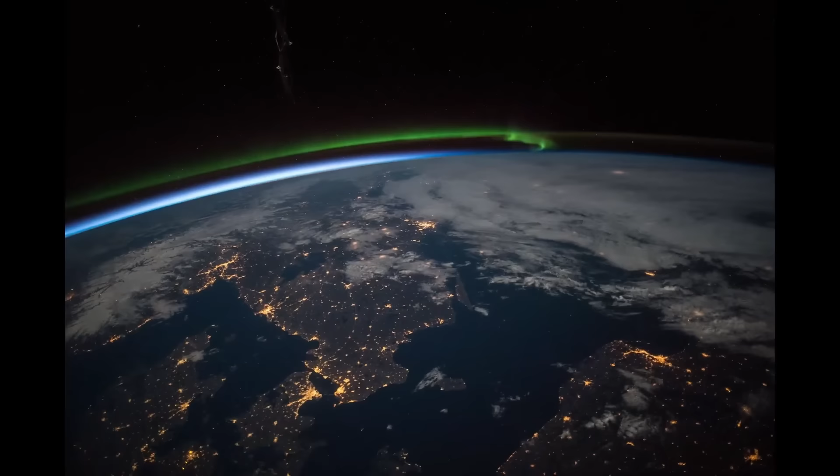The 3 countries of the main Scandinavian peninsula have all in the past maintained a policy of military neutrality.

Let's start with Norway. At the outbreak of World War II, Norway wasn't the wealthy country it is today. They were unable to defend themselves from German occupation. However, that didn't stop them giving the Germans a bloody nose, when the Kriegsmarine had the genius idea of sailing their brand new, prized heavy cruiser down a fjord and into Oslo in the middle of the night, practically unsupported. The Norwegians absolutely shredded it at practically point-blank range with Victorian-era naval guns and torpedoes.

If Norway gave Germany a bloody nose, Finland put the Soviet Union in a coma and on life support. Finland had a policy of armed neutrality, meaning a highly trained and prepared population. So when Stalin had the even more genius idea of invading, the Soviets lost 150,000 men. Soviet aircraft losses outnumbered Finnish losses about 30 to 1. Tank losses, 100 to 1. In the end, the Soviets won - won is in enormous air quotes there. Finland lost some land and maintained its sovereignty. The most Pyrrhic victory I'm aware of in modern warfare.

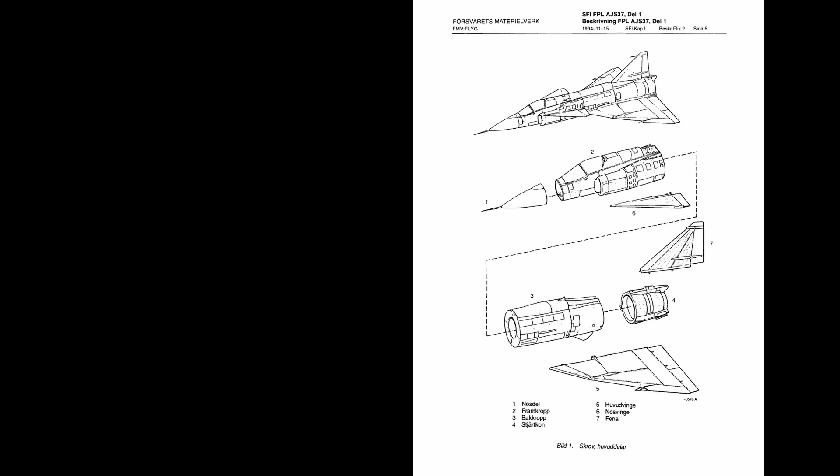I'm pretty familiar with the Viggen, but I didn't know that much about its computer until I started the research for this video. And that research has only been possible thanks to Alexander Blix, who provided me with an absolute goldmine of original declassified documentation for the Viggen.

That documentation is, of course, all in Swedish. I've therefore used some machine learning tools for translation, but Alexander and a few others have also been instrumental in providing translation for me. On the subject of language, I normally take a good shot at pronunciations. However, when I try to put on a Swedish accent to say Viggen, it just sounds like I'm from Wales, so I'll stop trying that. In my experience, Swedish people are very nice, so I doubt I'll make anyone too angry by messing up pronunciations.

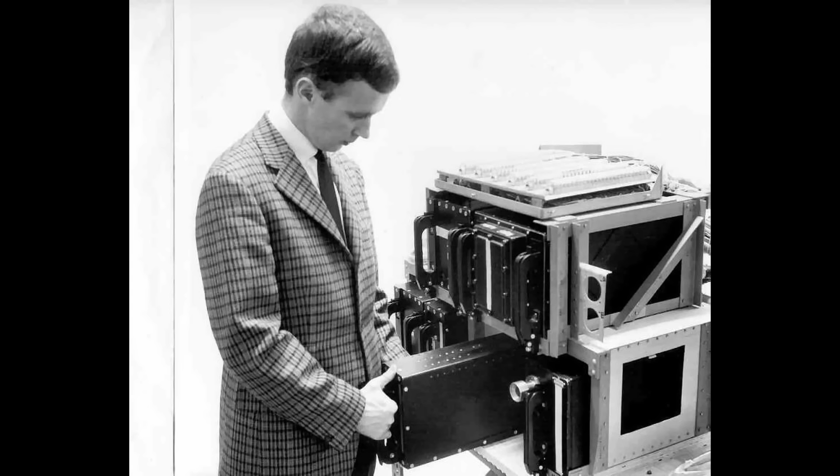As for the Viggen itself, we'll be discussing one specific variant, the AJ37. This first flew in 1967 and entered service in 1971. The AJ37 was the first variant to enter service, and it was the fighter-bomber variant. The CK37 computer was present in all AJ37 Viggens and remained in operation with upgrades until 2001. The computer I'll be discussing in this video is the original production variant of the CK37, unless I specify otherwise. There were 3 prototype versions, and the computer was upgraded with peripherals throughout its life, so it can get a little confusing going through the source material sometimes.

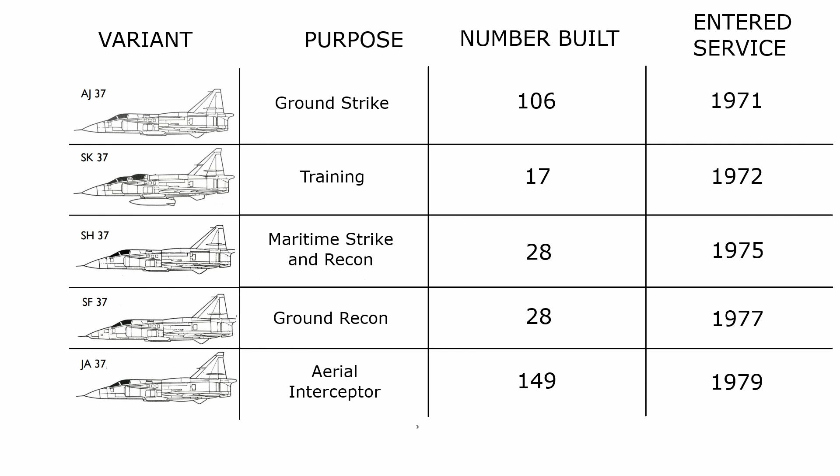On that subject, the AJ37 is not to be confused with the later interceptor variant, the JA37, which entered service in 1979. This also contained a highly advanced computer, but that computer was manufactured in the US. In fact, the JA37's computer was a direct development of the F-14's computer. But that is a different discussion. Let's find out why the Swedes were so keen to be the first to develop the first ever fighter with a compact digital central computer.

To understand the need for such a complex computer, we need to appreciate Sweden's use case for fighter jets in the first place. Most nations build or buy aircraft for a wide variety of roles or missions. Take the Eurofighter, for example. It's designated as a multi-role fighter. It can be used for ground strike, air superiority, electronics warfare, reconnaissance, SEAD, the list goes on. And it's designed to fulfill those roles practically anywhere on Earth.

Sweden's Air Force, on the other hand, is designed to operate in one place, Sweden. And the AJ-37 was designed solely as a ground strike aircraft to be used for one role, repelling an enemy invasion. There were of course some highly specific requirements to allow it to fulfill this narrow role. Probably most famously was the requirement to take off and land in just 450 metres. This allowed it to land on specially designated stretches of public highway, and subsequently be dispersed around Sweden's vast forests, hidden from prying eyes. This limited application presented an opportunity.

The AJ-37 was designed as the replacement for the Lansen, which entered service in the mid-1950s. The Lansen was of course an excellent aircraft and was only retired in 1997. But to keep up with Western and Soviet contemporaries, the Viggen would need to be much faster than the Lansen, which could barely manage supersonic flight.

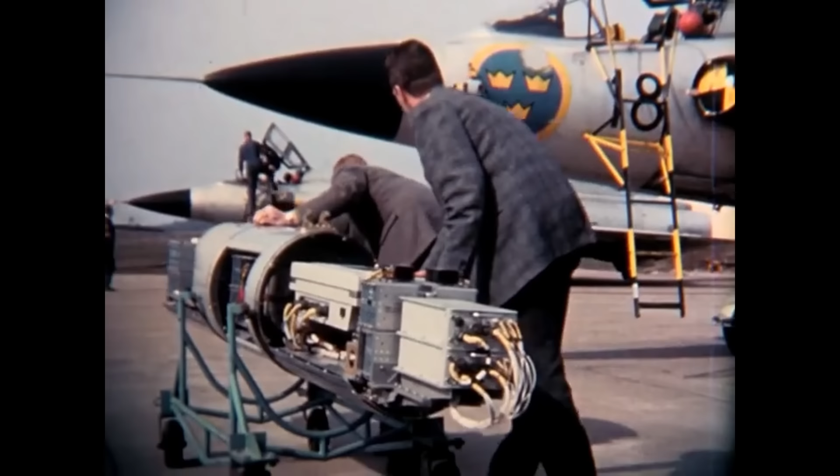A ground strike aircraft placed more requirements on the crew, navigation and weapon system management being the two most pressing. So, the Lansen was a 2-seater aircraft, a pilot and a navigator. The Draken just needed a pilot. Some of its radar and flight data needs were handled with analog computation devices, but, well, analog computers are a bit of a build, maintenance and capability nightmare. By the way, we'll revisit analog flight computers in a big way in my next video.

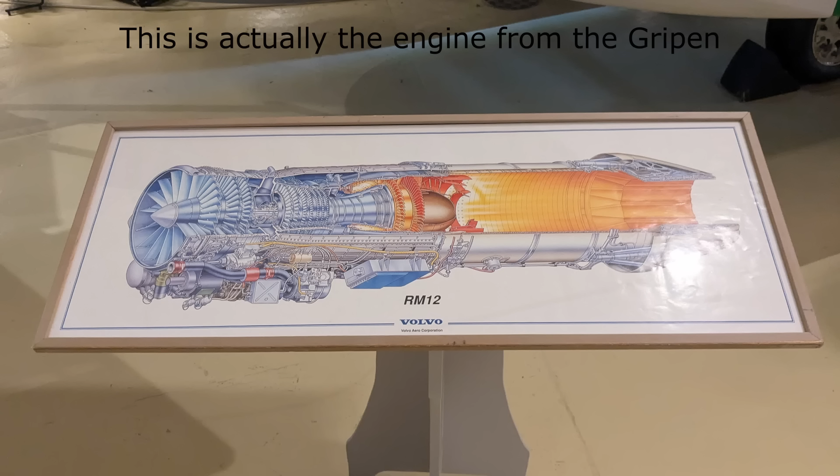So, it seems there were 2 options. A fast strike aircraft with 2 engines that would be expensive but meet the need for a supersonic fighter, or a slow one with just 1 engine, cheap, but Sweden already had one of those. How about an innovative third option? Replacing that second crew member with a digital computer.

Before we get into how the CK37 was developed, I think it's appropriate to take a couple of minutes to put it into context alongside 2 other early digital flight computers. Between the mid-1950s and the mid-1960s, almost every general-purpose computer sold to the general public used discrete components. That is, individual transistors, diodes and resistors used to build logic gates. And those logic gates were combined to form logic and control units, and those were combined to form a processor.

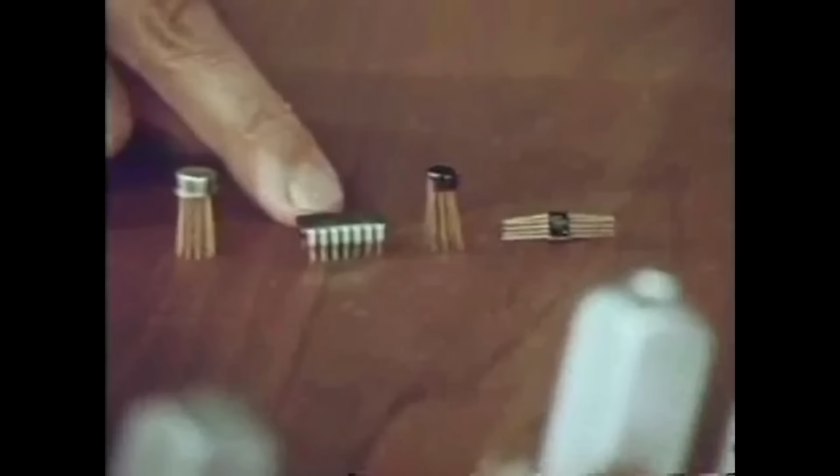The CK37 was, I believe, the first computer to be constructed using publicly available integrated circuits. That is, single chip packages which combined multiple transistors in a small and convenient package. IC-based computers did exist prior, in the form of ballistic missile guidance computers, but they may have only beat the CK37 by a matter of months.

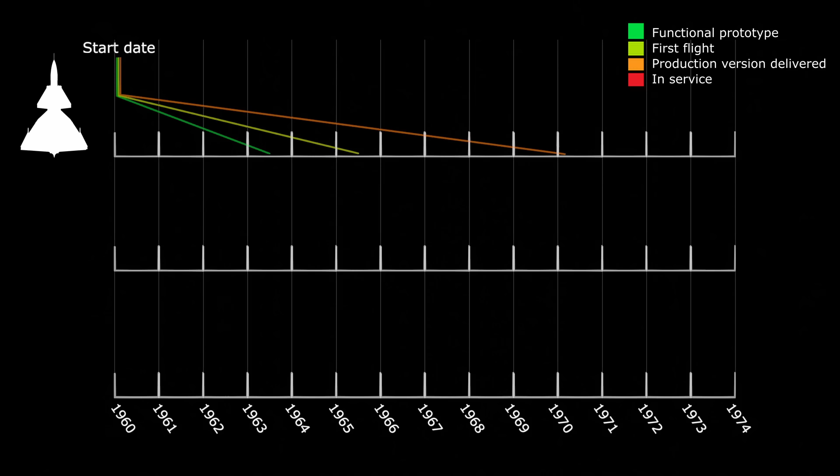The first prototype was delivered sometime in the middle of 1963, which also beat the IBM 360, which is also often quoted as the first IC-based computer. And the second prototype of the CK37 first flew in 1965 in a SAAB Lansen. That is an event believed to be the first ever flight of an IC-based avionics computer. The first production computer was delivered in April 1970, and of course the Viggen as a whole went fully operational in June 1971. And that brings us to our first comparison.

The most famous integrated circuit-based computer of all time, and favourite topic of this channel, the Apollo guidance computer. And before we go any further, let's be clear, these comparisons are for historical context.

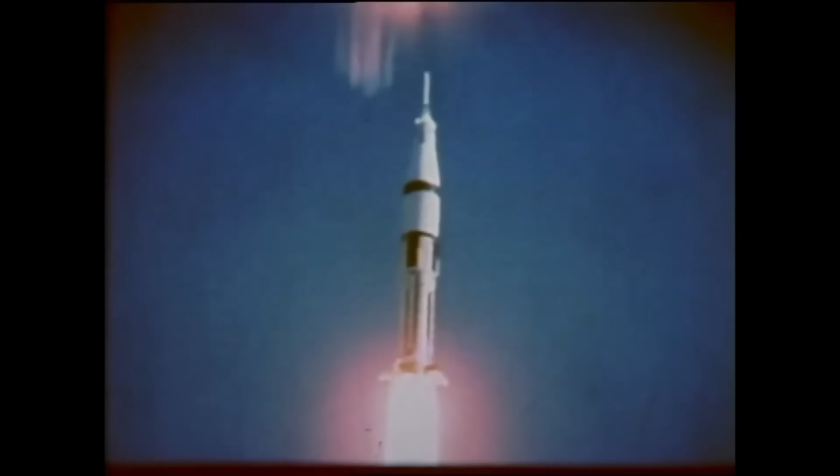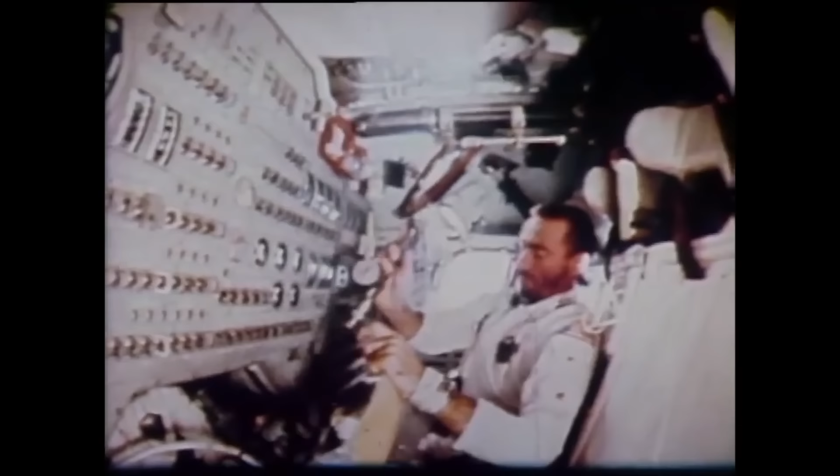It's really fuzzy to try and define a production version of the AGC, as it was really an experimental system throughout. The Block 2 was the final hardware version, and that first flew on the first crewed flight, Apollo 7, in October 1968. But the final version of the AGC, complete with lunar landing software, was of course first flown on Apollo 11 in July 1969.

An epilogue to all of this is the AGC digital fly-by-wire, first flown in May 1972. I made an entire video about that.

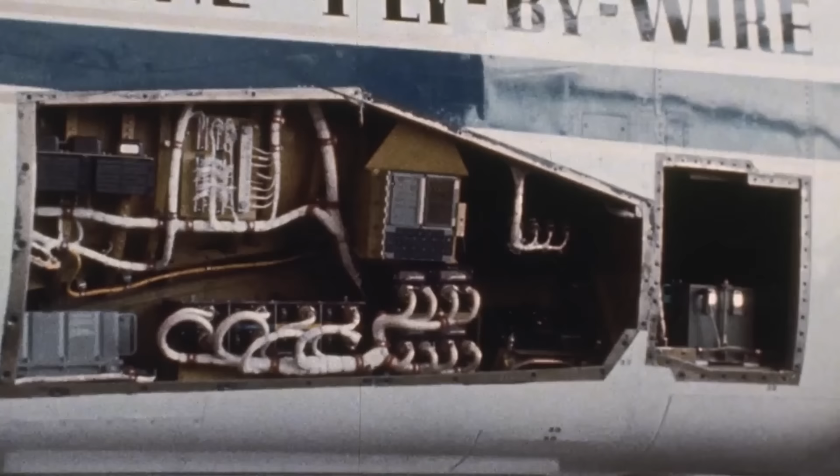Now, imagine combining all of the ICs that make up the CK37, or indeed the AGC, into a single chip, or at the very least a small handful of chips. That'd give us what we now call a microprocessor. And that is what the MP944, which formed the processor of the F-14's Central Air Data Computer, was. I suppose you could say it represented the next generation of flight computers after the Viggen.

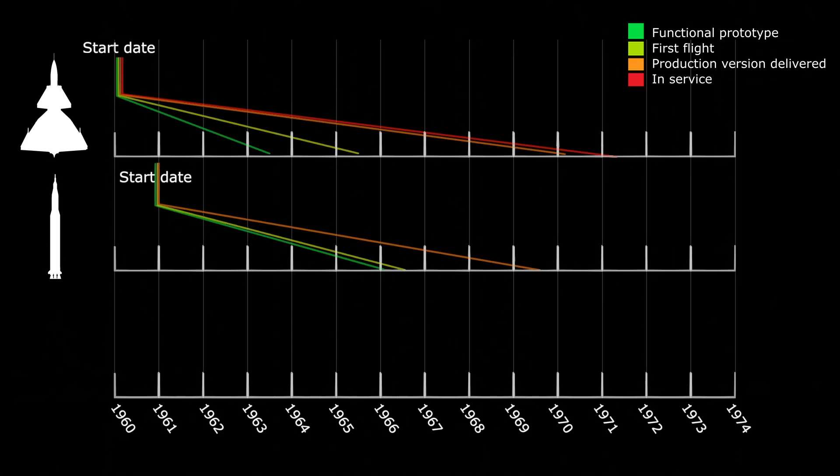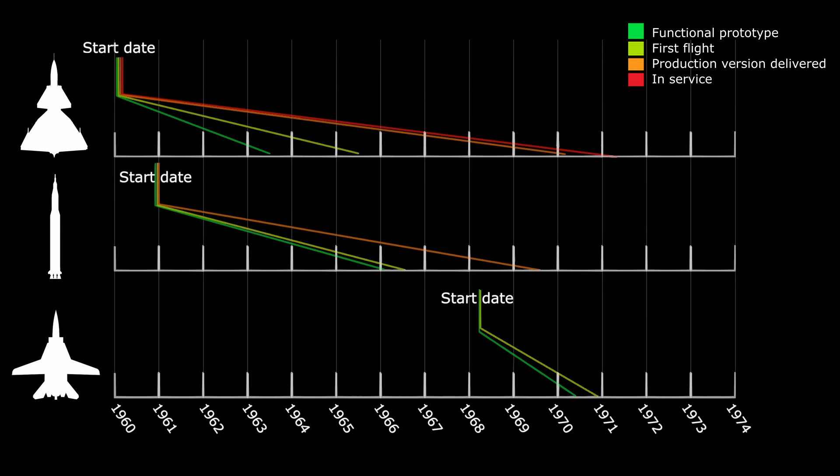The MP944 had a development cycle that is best described as heroic - just 2 years from conception to first delivery. The first operational unit was delivered in June 1970, and a working prototype probably existed sometime around April of 1970. The F-14, and by extension its computer, first flew in December 1970 and entered operational service in September 1974.

One other flight computer I should quickly mention before we move on is the one that was in the F-106. That flew in the late 1950s and was probably the first digital flight computer. It was remarkably advanced for its time, but it was an entirely different beast to the CK37 - it consisted of vacuum tubes. So while the CK37 was the first integrated circuit-based flight computer, it wasn't quite the first digital flight computer outright.

Now let's discuss capability. The two broad aspects I'd like you to have in the back of your mind are scope and authority. What I'm calling scope is the range of tasks required to be performed by the computer. Authority is how much control the computer was given and the extent of the consequences if it failed. In its role as a flight computer, and compared to the two others I just mentioned, I'd say the CK37 was a relatively high scope but low authority machine.

Let's look in detail at what it actually did. There were two broad families of tasks: navigation and fire control. I'll look at some of the individual programs that made up these families in the software chapter later, but for now, let's just cover what data was fed into the CK37 and what it was able to provide to the pilot.

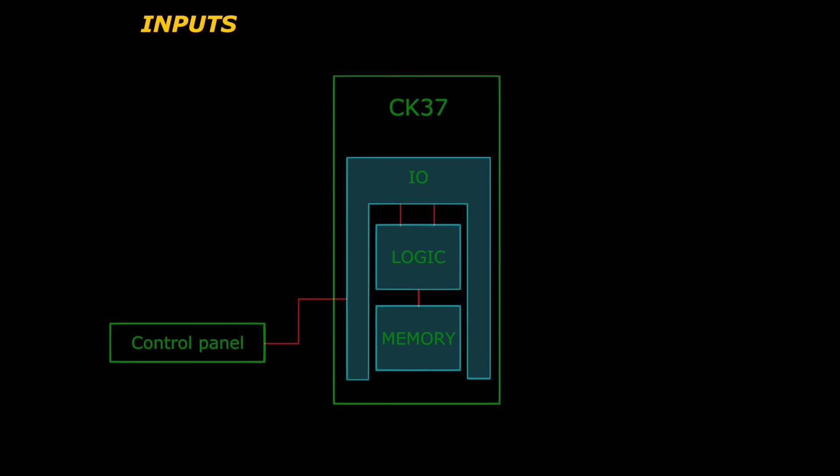The first navigation function was waypoint navigation. The coordinates of waypoints were saved in memory, and the pilot was able to enter additional waypoints via the data console, which was a small numeric keypad with a 6-figure display near his or her right hand. To resolve the current position and velocity vector of the aircraft, the computer had a range of inputs available.

The first was the inertial navigation system. It was not a top-of-the-range system - we've spoken a lot about those in the past, and those are extremely expensive. But over short periods of time, the gyro-stabilized accelerometers and rotational encoders on the gyros themselves were sufficient to determine velocity and distance travelled. These were complemented by a Doppler velocity measuring device to improve accuracy to a level sufficient for navigation. Long-term viewers of this channel may remember the deep submersible Alvin uses a similar approach of complementing inertial measurement with Doppler velocity for navigation.

Over longer time periods, the pilot could perform a manual position fix by entering their current known position either from radio distance measuring equipment or visually. If using radio measuring equipment, this would be entered via a single button push. The radio navigation receiver and decoder was directly available to the computer as an input. In theory, radio navaids were always available because remember, the Viggen was only intended to operate in Swedish airspace. The position fixes disciplined the dead reckoning performed by the computer, which would drift over time.

Landing navigation was also performed by the computer. For a predetermined airfield, the computer would provide display information to the pilot to guide them onto the necessary path for a standard approach. For sparse airfields, the navigation subsystem would use the determined position of the aircraft to calculate the approach path. For airfields equipped with an instrument landing system, the computer would switch over automatically to use the ILS data supplied to guide the pilot to a landing.

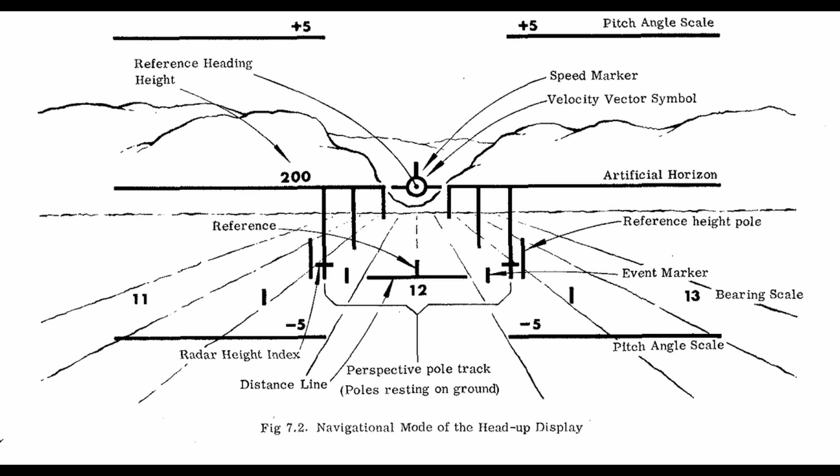Additional data would be displayed on the HUD when it was put into attack mode, so to complete our review of the CK37's basic functionality, let's briefly discuss the fire control functions.

Unguided bombs, guns and rockets all seem ridiculously crude for an advanced jet like the Viggen, but there are 2 points to consider here. Number 1, the Viggen was first designed in the 1960s, that is, more than 60 years ago. Number 2, even today in 2024, fighter aircraft still often come equipped with cannons. They aren't intended as a primary armament, but they are very useful as a show of force. We'll discuss a real-life example towards the end of this video.

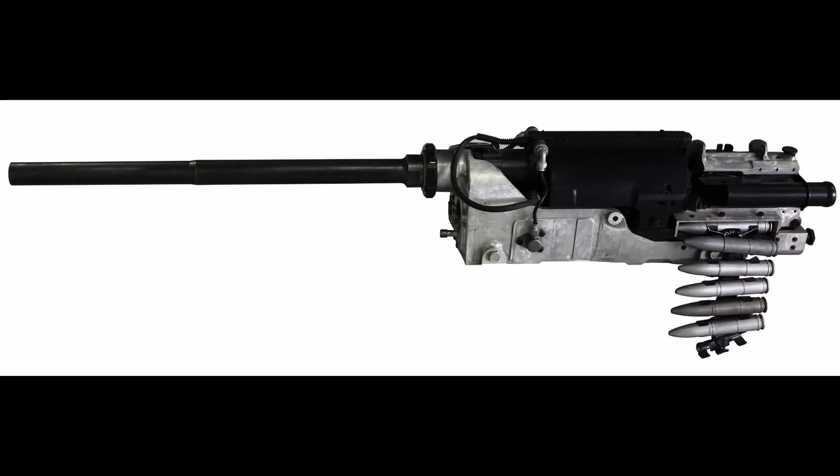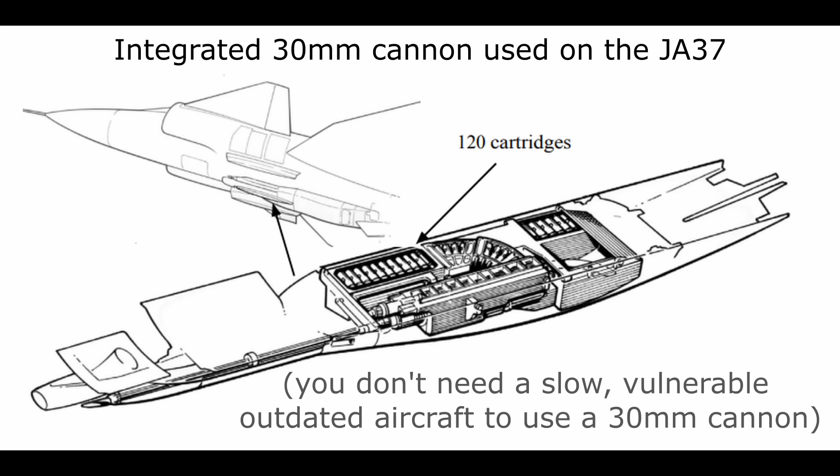The fire control function I can find the most information on is that for the guns and rockets. I'll only discuss it briefly here because we'll be discussing a conceptually similar system in a very big way in my next video. I'm keeping the subject of that video secret, but based off my earlier comment, I suspect there's enough info there for people to take a guess at what it'll be on. Feel free to speculate in the comments and try and bait me into revealing it.

Anyway, when in attack mode, the pilot could manually track the position of a target by placing the aiming symbol over the target and tracking it.

The computer would determine corrections for lead, wind and ballistic drop and provide a marker on the HUD to aim for. To perform these calculations, the range to and relative velocity of the target required determining. The attack radar automatically provided range data to the CK37. Onboard gyroscopes reported the angular rotation of the aircraft, allowing for lead computation.

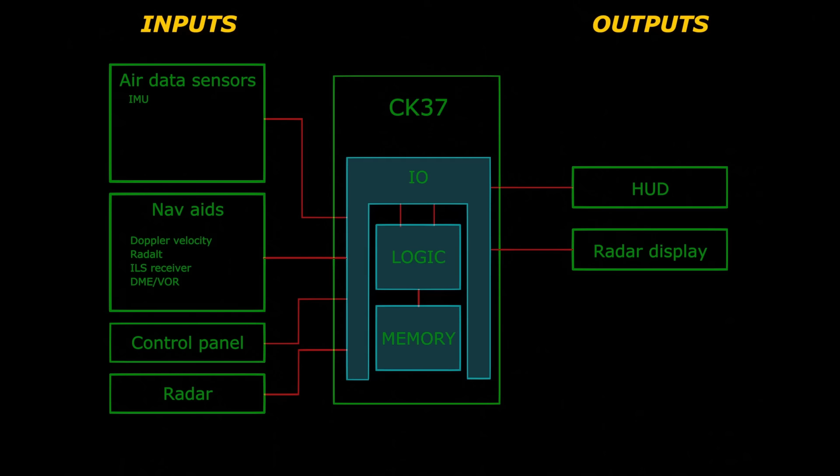In addition, data from angle of attack, barometric, airspeed and other sensors were also passed on to the CK37 to allow for ballistic calculations. I don't have much information on the unguided bombing program, but I suspect it'd be quite similar, with situational data provided to the computer, which would then provide a target marker for the pilot to release the bomb at. Similarly, the CK37 was tied into the systems for more advanced guided weaponry, such as the RB-04 anti-ship or Maverick air-to-ground missiles. These were comparatively autonomous, but would require some integration with the Viggen's onboard systems.

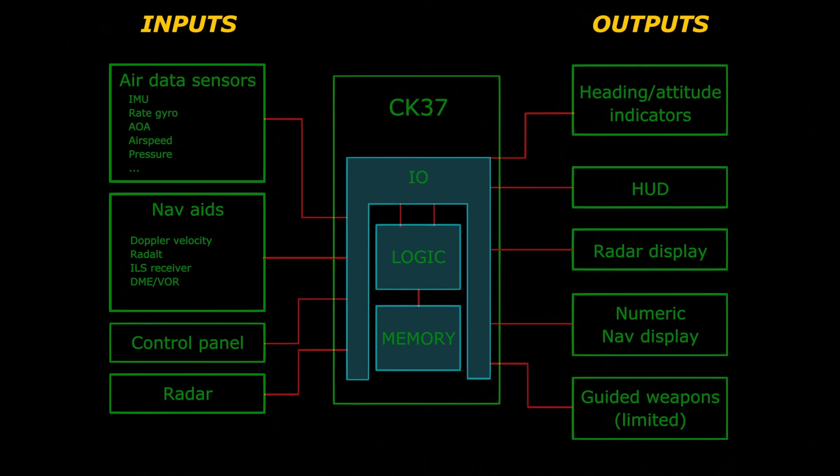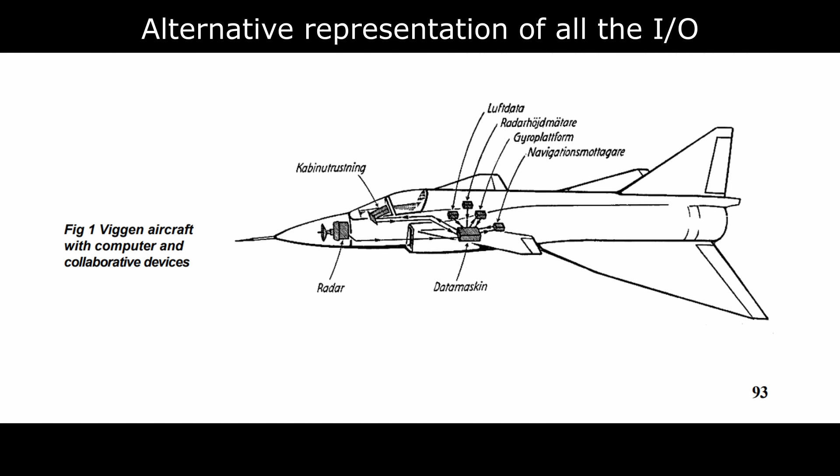In addition to all of the above, the CK37 continually performed self-checking. While not as comprehensive as the error detection on something like the F-14's computer, it was sufficient to alert the pilot in the case of a computer system failure, and was perfectly sufficient to perform its role as a non-flight critical system. So that's a summary of everything the CK37 did.

Against the AGC and the F-14 CADC, I'd describe it as high scope, low authority. In other words, it did a lot, but the consequences for failure wouldn't be too dire. The F-14's computer only performed a narrow range of functions, but it was flight critical, and therefore carried a higher burden of responsibility than the CK37. Though it is probably worth noting the CADC could have performed many, many more functions, but it'd be either brave or foolish to put so much responsibility on such a nascent technology.

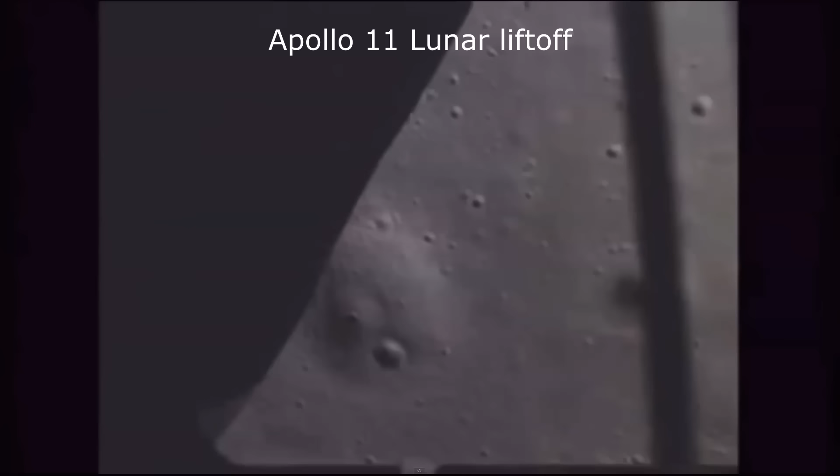One reason the Apollo guidance computer is considered so pivotal is it was high scope and high authority. Barring redundancy, of which there was a surprising amount in both Apollo and the digital fly-by-wire experiments, loss of AGC function would likely mean loss of crew and vehicle during many points of flight. Yet it also performed an astonishingly wide range of tasks. But the AGC came after the CK37, and that is one of the many reasons the CK37 deserves its place at the forefront of computing history.

Now, before we finish this chapter, I found some nice reference images for the various HUD modes and displays just a couple of days before releasing the video. I don't really have room to include them in this chapter, but if you skip to the timestamp on screen, I'll display them there. The translations aren't perfect, as I just used machine learning translations, but I think they generally make sense.

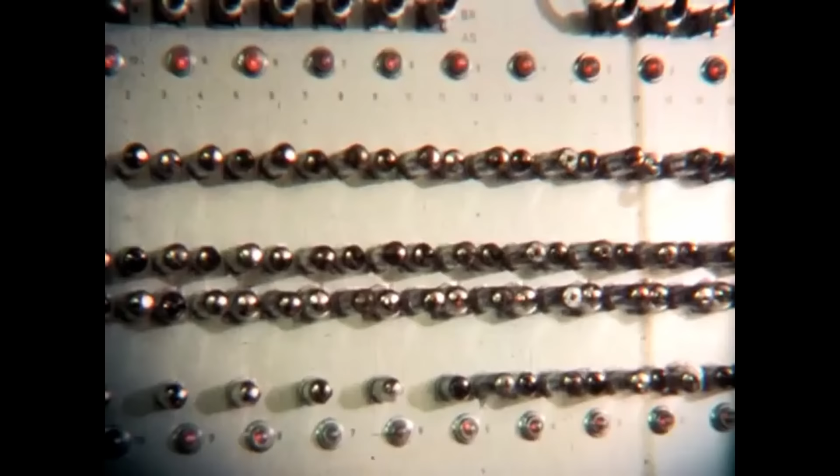I think the best time to start the story of the CK37 is in 1960. SAAB already had experience in building and experimenting with electronic computers, having formed a dedicated subsidiary. Work had already begun on designing the Viggen, and the company were well into investigating the feasibility of replacing the navigator with a digital computer.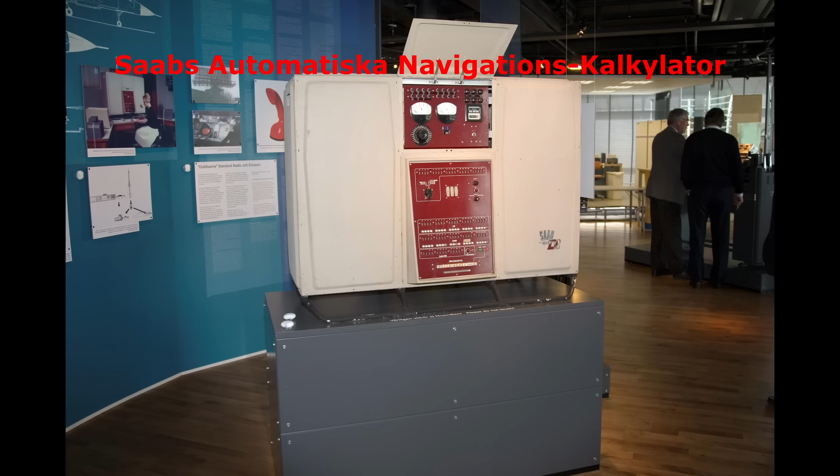A crucial step in this decision was the development of the D2, originally called the SANK, which stands for SAAB's Automatiska Navigations-Kalkylator. I wonder what that is in English. Anyway, let's just call it the D2 going forward.

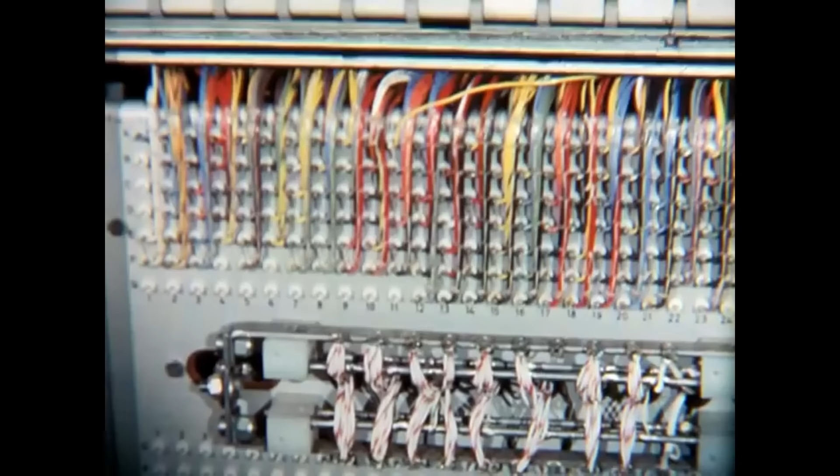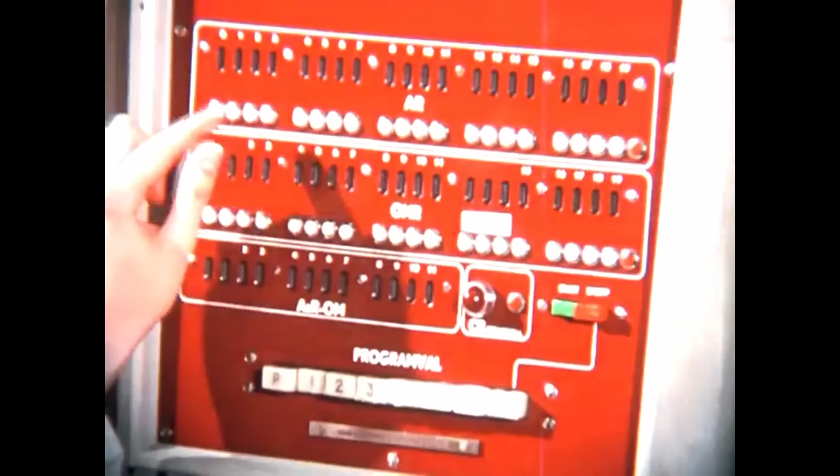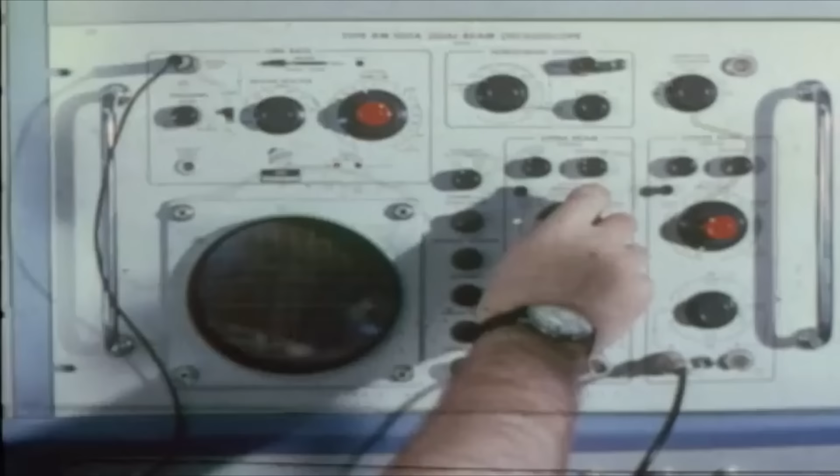Anyway, the D2 was used to run demo sighting and navigation programs, thus demonstrating the feasibility of an airborne computer. To me, this seems to represent the decision point to pursue a single crew aircraft. If a 200-kilogram computer could be built, surely it could be miniaturized in the several years available before the Lansen's required replacement.

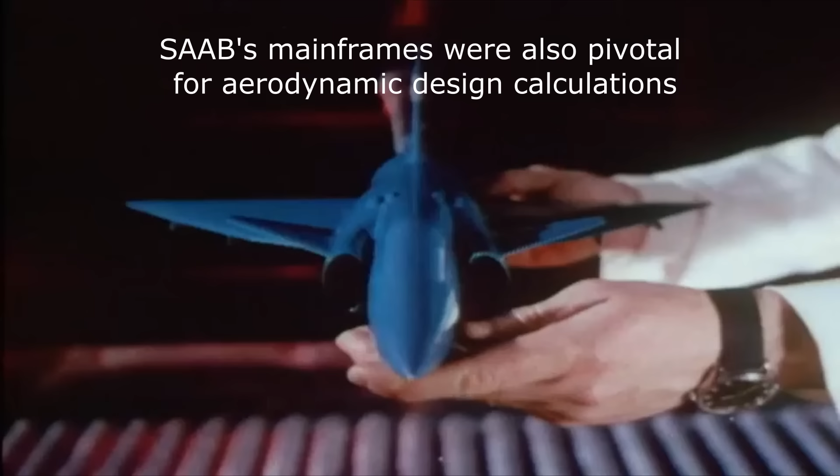And that miniaturization was achieved through an absolutely brand new technology, integrated circuits. Why include a single transistor in a package when you can include several on a single silicon die? That's all an integrated circuit is.

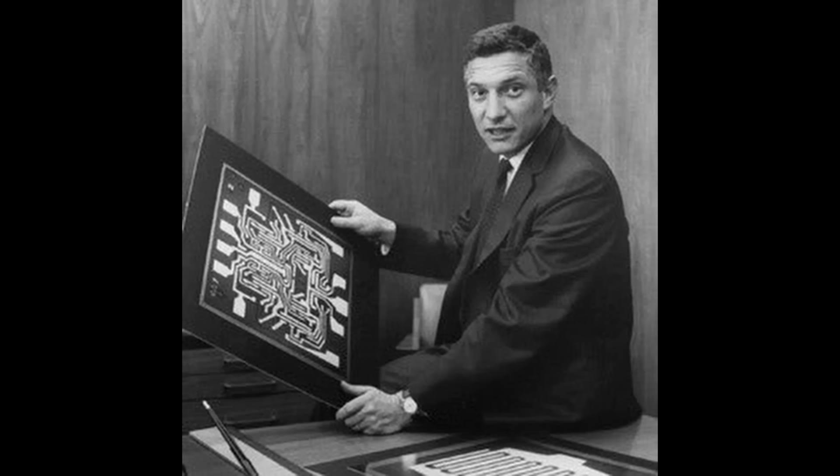This technology was independently invented by Fairchild and Texas Instruments in the US, thanks to a virtually unlimited military budget, as required for reasons you can learn about in my last video. There we met Robert Noyce of Fairchild, who brought the first practical ICs to market, the Fairchild Micrologic series.

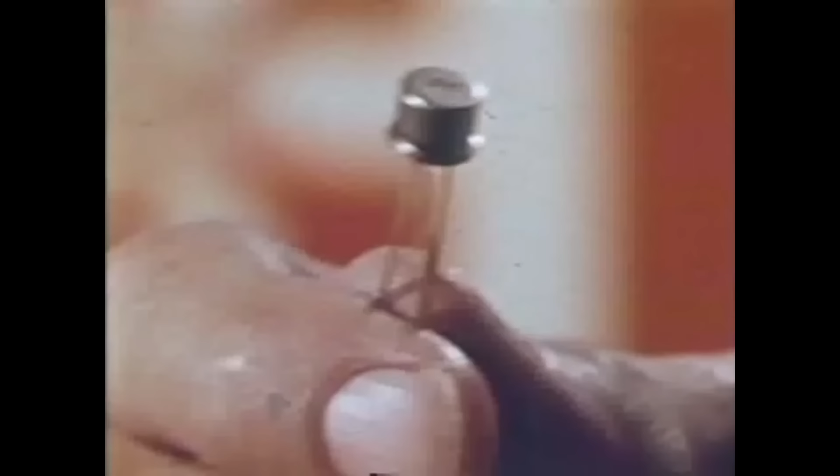Before they were even publicly available, Bjorn Hallberg at SAAB, who according to SAAB became Europe's leading expert on ICs and the first person in Europe to hold an IC in his hand, sent a representative to meet with Noyce and the team at Fairchild.

Sweden may have been militarily neutral, but they were very much aligned with the West, and the Americans were happy to discuss the technology with them before the general release of the Micrologic series in July 1961. No, it probably wasn't because they foresaw the Viggen potentially protecting their Polaris submarines - that appears to be a myth concocted after the fact.

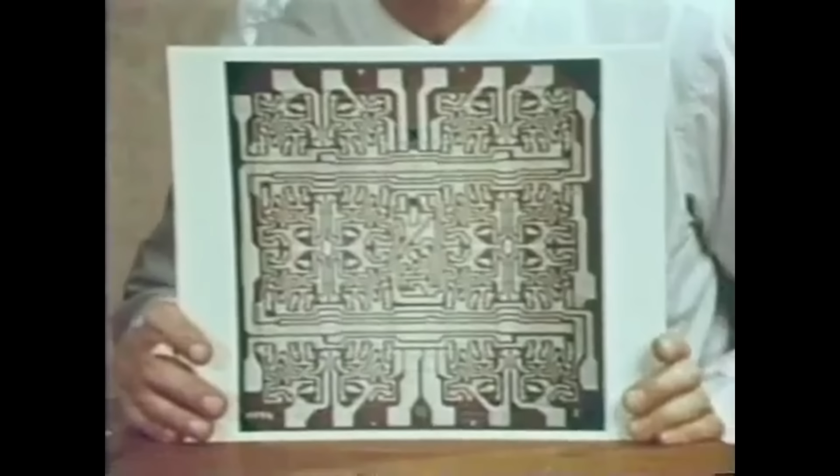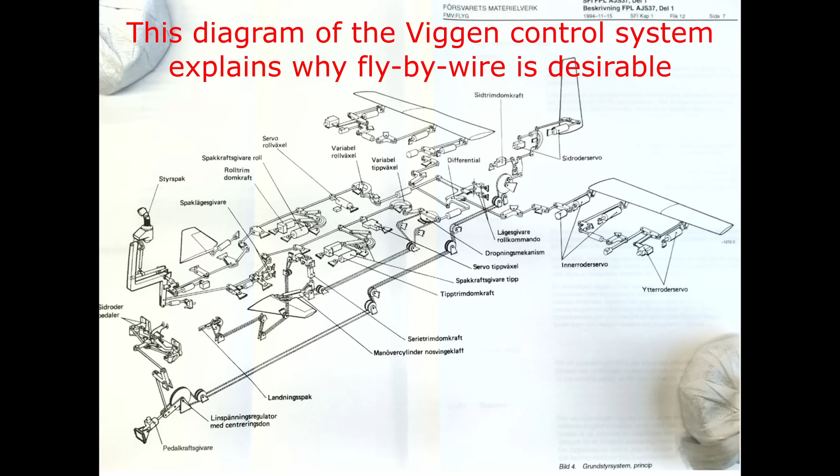The major concern with these new components was reliability. Now, the CK37 was not flight critical as such - unlike something like a fly-by-wire computer, a catastrophic failure wouldn't cause a loss of aircraft. However, it probably would lead to a loss of mission.

For this reason, the complexity of adding redundant computers could be avoided. But a reliability for the system as a whole on the order of one failure per several hundred hours of operation was necessary. The CK37 contained approximately 2,700 integrated circuits, in addition to 1,400 discrete transistors and 3,800 resistors.

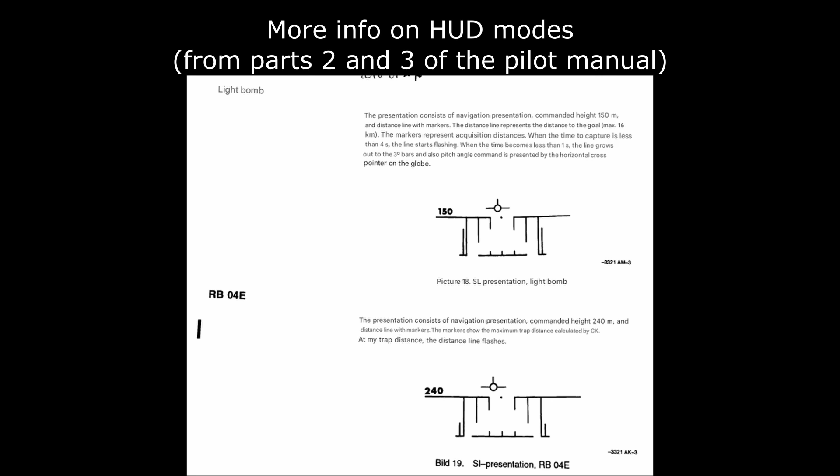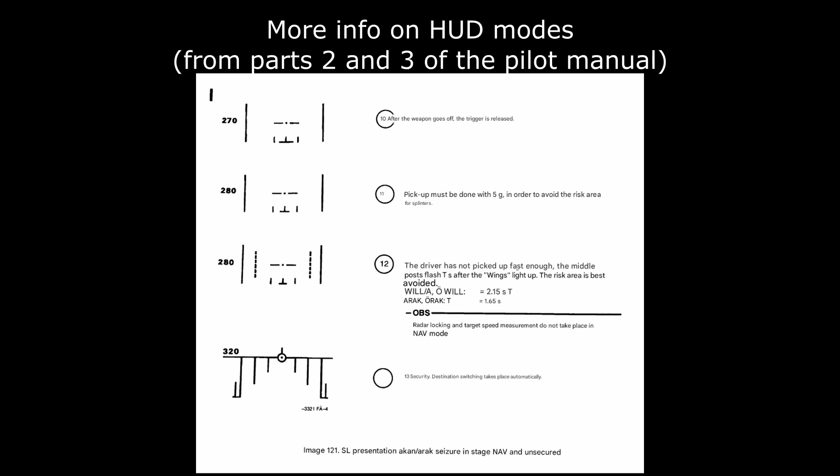Extensive reliability testing of the components, the circuitry, and computers as a whole was carried out from the first delivery of the ICs in 1961 all the way to the first Viggen flight in 1967. The aggregate failure rate for an individual IC was about 0.006% per 1,000 hours of operation. For a single computer, that would give a failure probability of around 15% per 1,000 hours of operation.

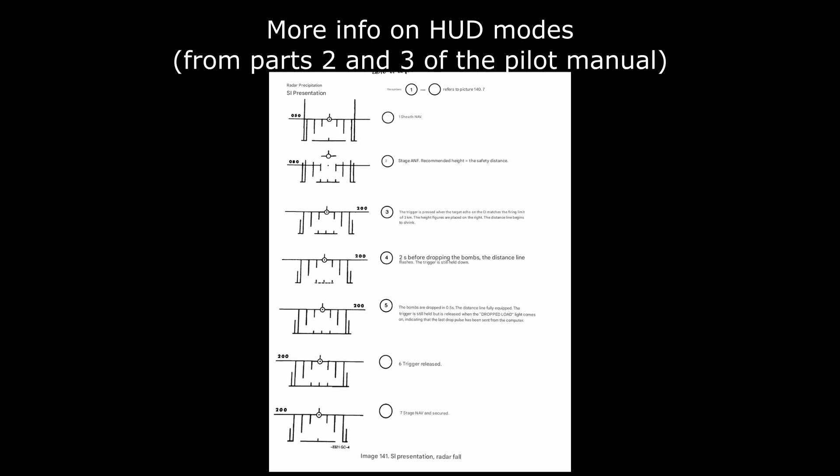Of course, the ICs were far from the only element that could fail. The computer contained 51,000 solder joints. Despite soldering being carried out by a certified technician and every joint being inspected individually under a microscope, 50% of failures during testing of the computer were due to solder joints.

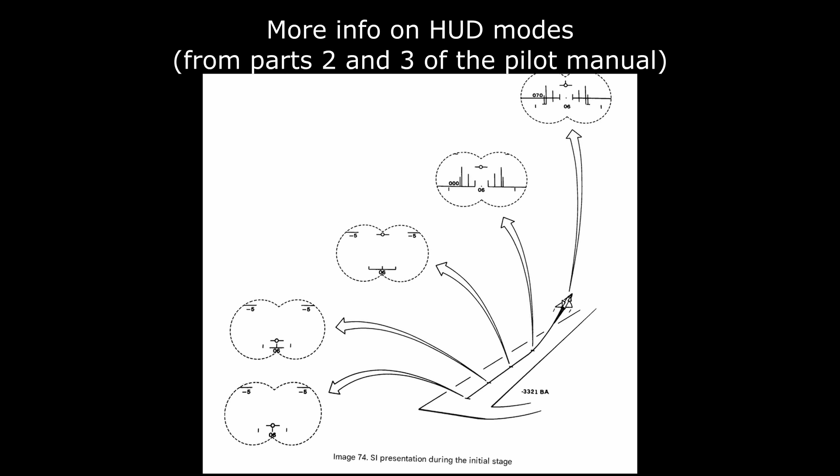This is actually another reason for switching to ICs - 51,000 joints is a lot, but it's less than would be necessary for discrete components. The conclusion of the testing was a predicted mean time between failure for the CK37 of 250 hours under operational conditions, and that was deemed acceptable.

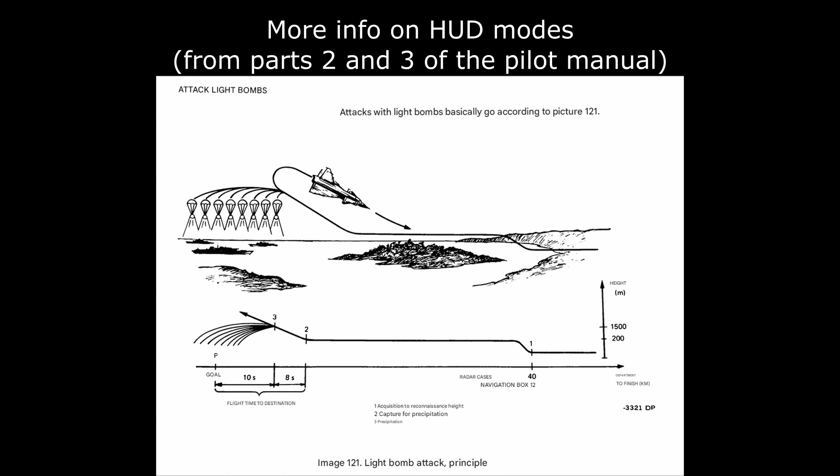With an estimated 150 flight hours per aircraft per year, this equated to a computer failing on average 0.6 times per year. That sounds like a lot, but anyone familiar with aircraft maintenance will know how often components are swapped out, especially in military systems.

The final CK37 was delivered in 1978. The final flight of a CK37 equipped Viggen was an AJS variant flown in 2005. Though upgraded with various peripherals, and though individual computers were replaced if they failed, the CK37 was never replaced by a successor over the lifetime of the AJ37.

With the successful deployment of the CK37, a civilian version was also released. Amongst other users, these were apparently used in the Hasselby-Värtan thermal power plant and the Marviken nuclear power plant, which was never actually used. I don't know whether any of these survive to this day, but it is encouraging to hear that the CK37 also brought direct benefits to the civilian sector.

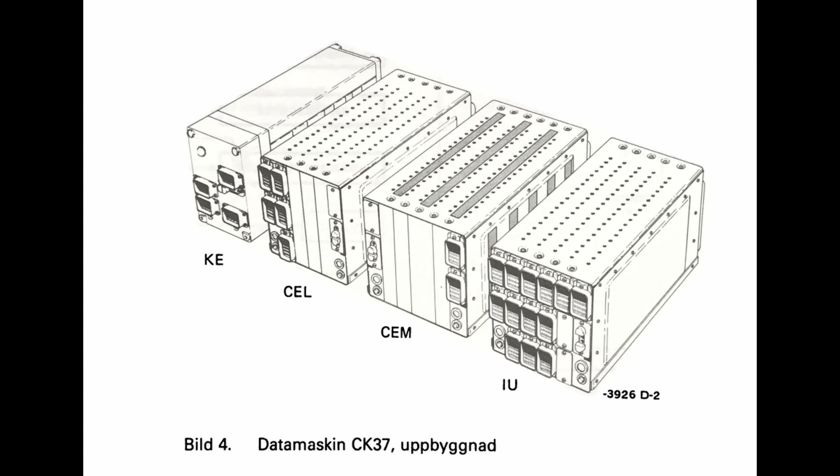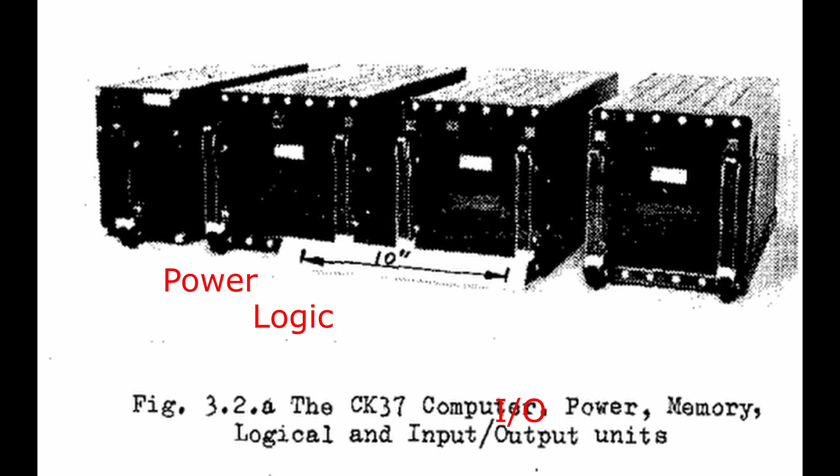The CK37 comprised 4 distinct modules: power supply, memory, logic, and I/O. A complete CK37 consisted of 1 of each of these modules. Each module was a cuboid measuring somewhere around 15 by 30 centimeters. Collectively, the 4 units weighed 70 kilos. Total cost per computer was around $500,000 in 2024 money.

All but the power supply were of an unusual physical construction - I've never really seen anything like it. Let's get hold of some of those integrated circuits and build up a hypothetical section of the logic section. This is a Fairchild Micrologic 914, one of the actual chips used in the CK37. Now, the original computer used metal cap chips like these. Unfortunately, I could only get hold of 4 of these, so we'll have to make do with one resin-capped chip too - the chip inside is still identical.

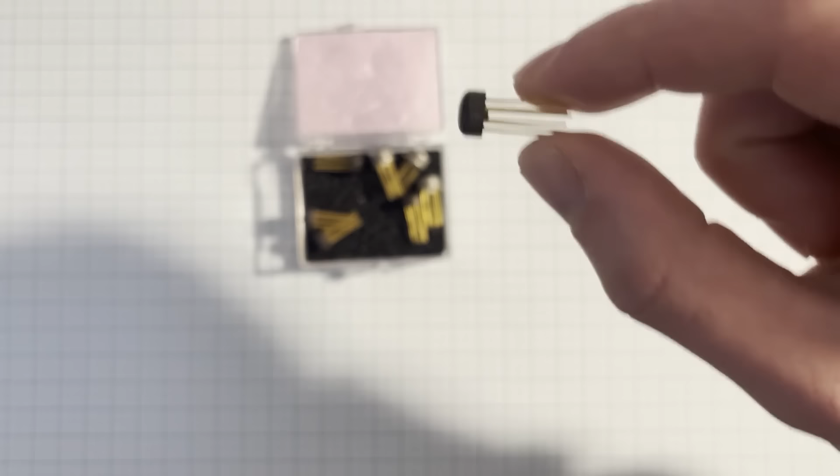Prior to about 1962, if we wanted to make a computer, everything had to be built from individual transistors and resistors. A good first step is to build a universal logic gate. Here is how we build a NOR gate from transistors and resistors.

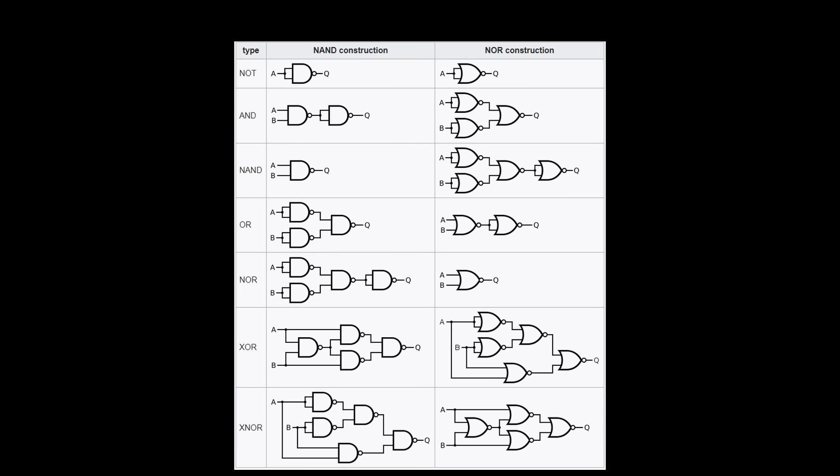In principle, if you can build a NOR gate, and you can build some form of memory, and we'll get to memory later, you can build a computer. That is because NOR gates can be used to build any other gate.

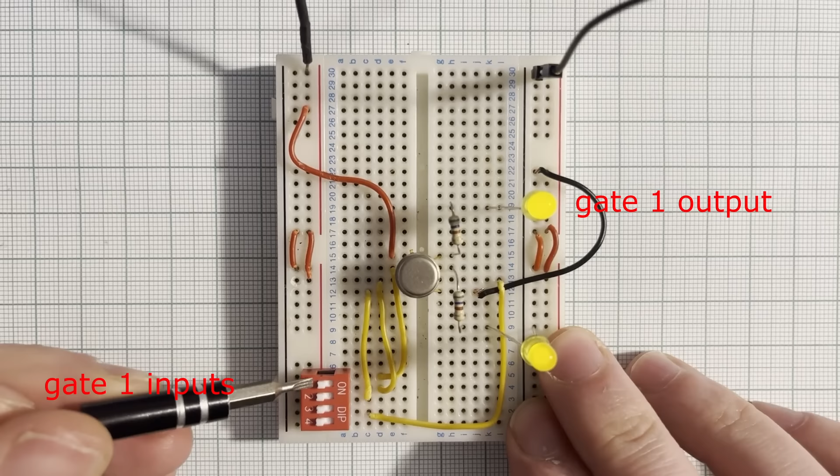And that's what these ICs are. These are NOR gates, 2 on each chip. We provide inputs here, and our outputs are here. Voltage and ground are supplied through these pins. So that's 6 resistors and 4 transistors reduced to a single chip.

Though this is a very simple IC, we can already appreciate how ICs like these reduced the size and complexity of early computers. Okay, great, a NOR gate, so let's make it think.

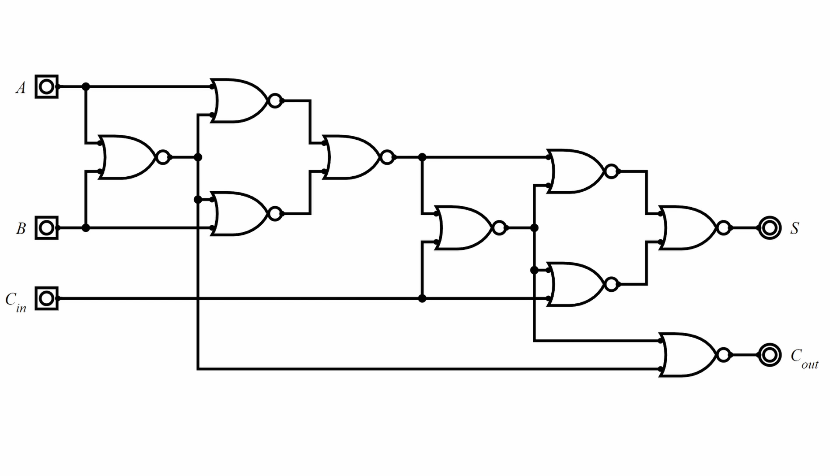If we arrange them like this, we have a full binary adder. It takes 3 inputs and outputs the sum, so this can add up to 3. Let's build it physically with my ICs.

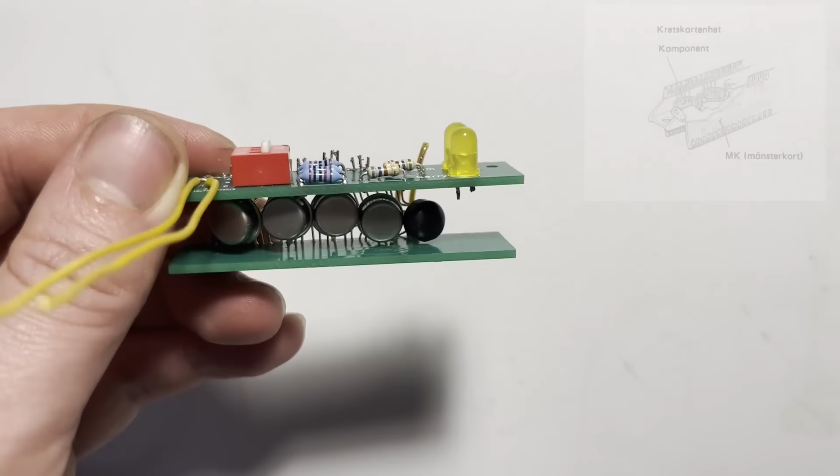If we did this today, we'd build it all on a simple PCB. But PCB standards were not where they are today back in the 1960s. To reduce the risk of individual boards becoming dislodged and disconnected during high-G maneuvers, the components were mounted on aluminum beams and connected via very thin circuit boards at the sides.

Our 3 inputs are here, and our outputs are here, with LEDs to indicate the results. You can see me changing the inputs and the output LEDs displaying the result accordingly.

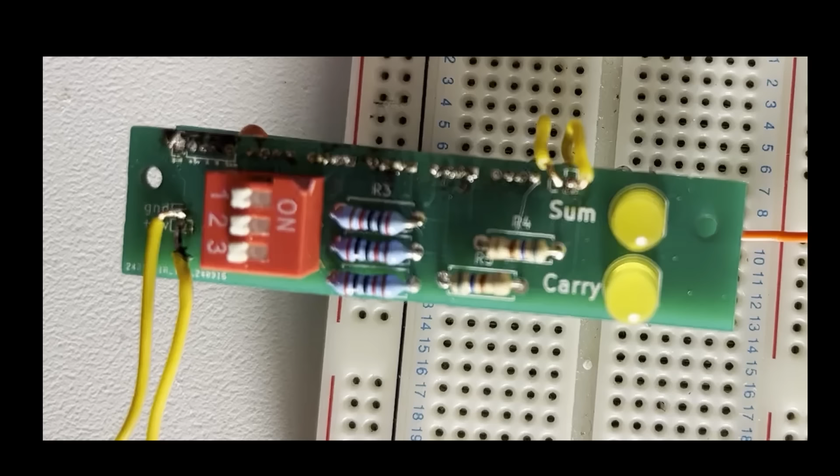For anyone wondering, this was really difficult to design, even if it is a really simple circuit. Modern PCB software doesn't really expect you to split components across 2 boards like this. I'm sure there's a way to do it properly, but this is most certainly not the channel to come to for good circuit design. What I've actually done for those interested is build a half adder on each board, since

each IC contains 2 NOR gates. The 2 boards are connected by common ground and voltage, much like in the original design where hand-soldered wires connected boards together. The full adder I've created isn't much use on its own, but let's think of the inputs and

outputs a little differently. If we label the inputs as 2 operands and a carry in, and label the outputs as a result and a carry out, we can start chaining full adders together.

In our hypothetical CK37 circuit unit, maybe we'd chain multiple adders to create a circuit that could add 13-bit numbers. I don't think it's a huge stretch to envisage other integrated circuits forming other logical units which could eventually be built up to form the computer as a whole.

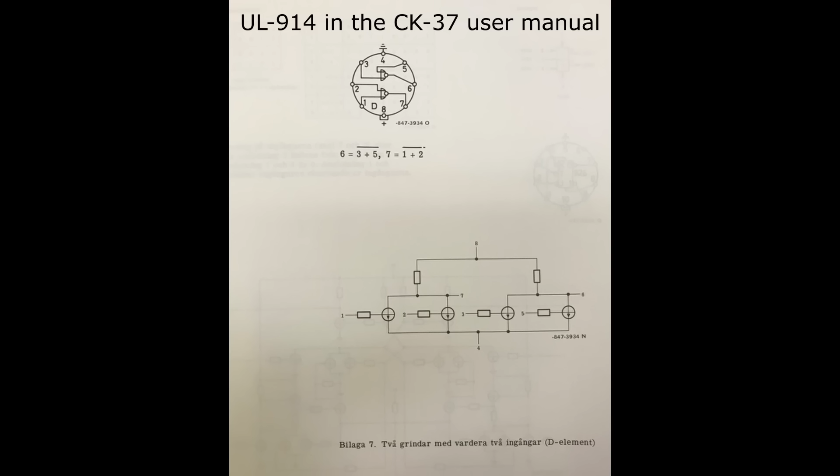Of course, there is a slight catch. The UL914 was the only of the original chips I could get hold of in reasonable numbers for a reasonable price. By the time the second prototype was built, Fairchild had released a half-adder IC.

2 half-adders and an OR gate make a full adder. So what I did here with 5 ICs would have been done with 3 in the CK37.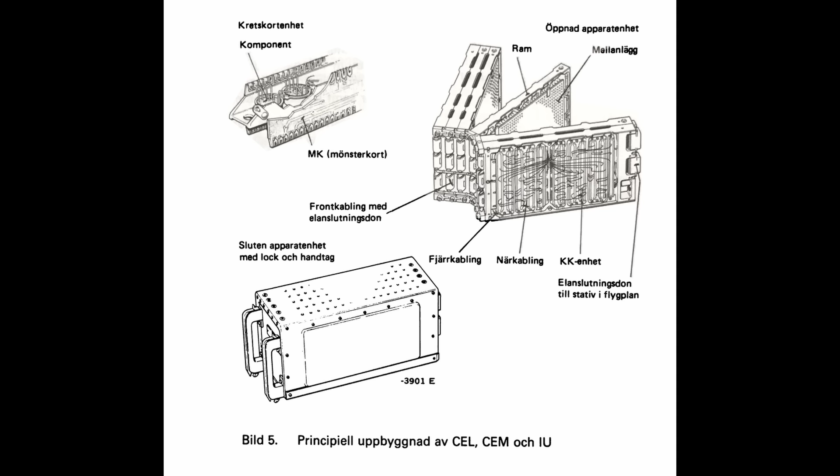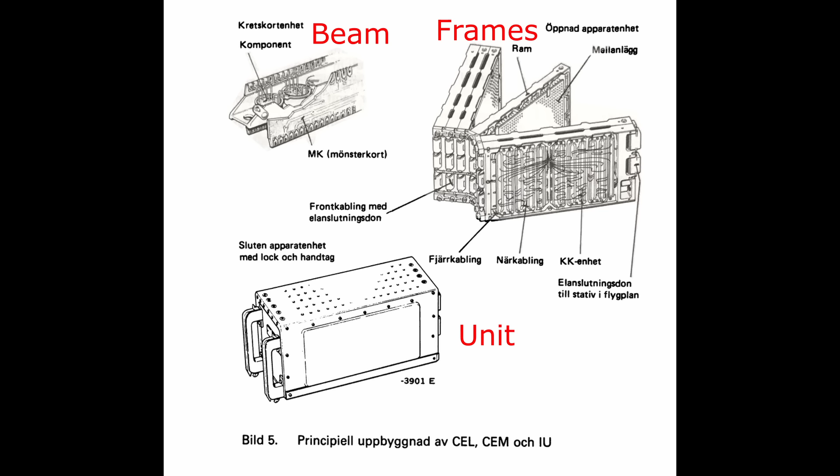Now, multiple beams like these, or circuit units as they were called, were connected to form a frame. And multiple frames were stacked to form each unit of the CK37 as a whole. And that is how the logic and the I/O would have been built up.

But how about the memory? The memory was ferrite core memory. 8,192 28-bit words were available. 2 of those were parity bits, hence me mentioning 13 bits earlier. As with so many old computers, the CK37 used that unconventional word length.

Now that memory equates to about 28 kilobytes, which for the time was pretty substantial. Of those 8,192 words, 6,144 were write protected and were preloaded with the flight software and all of the fixed variables. Included in those fixed variables were the coordinates of common waypoints around Sweden and the runway coordinates and directions for all relevant airfields in Sweden.

All of these were able to fit into memory. The other 2,048 words were writable, so were used for storing variables that the programs needed to read and write to. In addition, this space could be used to store additional navigational waypoints which could be input and altered by the pilot in flight if necessary. Additional subroutines could also be loaded into this space on the ground using a programmer interface.

Like every aircraft, the Viggen was not perfect. Several early flights resulted in crashes.

One of the more famous advantages of ferrite core memory over early flash memory is its resistance to crashes, as it's non-volatile. If the boards were recovered, their contents could be read back.

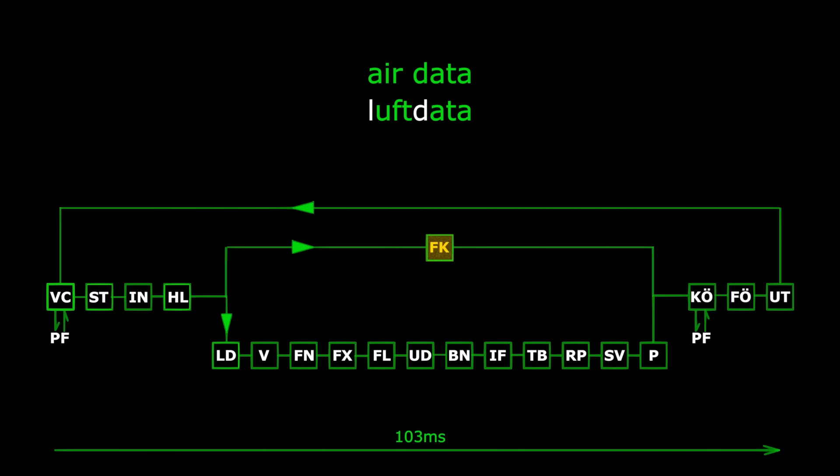The air data program read in data from the various sensors and made it available in the rewritable memory. This was followed by the velocity filtering routine, which removed noise from this data and computed the aircraft's state vector, presumably passing metrics such as airspeed and angle of attack onto the display instruments.

The Doppler radar also contributed to the velocity computation and allowed the ground speed to be inferred by observing the Doppler-shifted radar return from the ground. Radio navigation was performed next, automatically reading from the radio navaids instruments, allowing for a position fix.

Dead reckoning navigation was the next subprogram. This integrated the outputs from the inertial guidance unit to compute the aircraft's current position. The inertial guidance was actually operated in a closed loop, so at this point the computer sent corrections to the stable platform, allowing it to be realigned via magnetic coils if necessary.

With the aircraft position determined, an administration subprogram would check for waypoint alterations made by the pilot via the navigation console. The waypoint navigation was then performed, probably the most crucial of all the subprograms, as this was the primary requirement for the CK37 to act as a navigator. It'd compute the heading to the next waypoint.

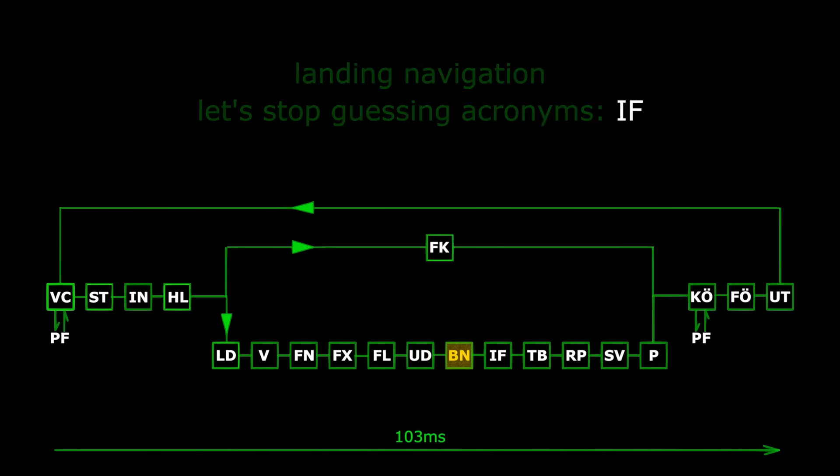Landing navigation was then performed. Of course, if the selector switch was not in landing mode, the program would immediately break and move on to time and fuel monitoring, another crucial aspect for waypoint navigation.

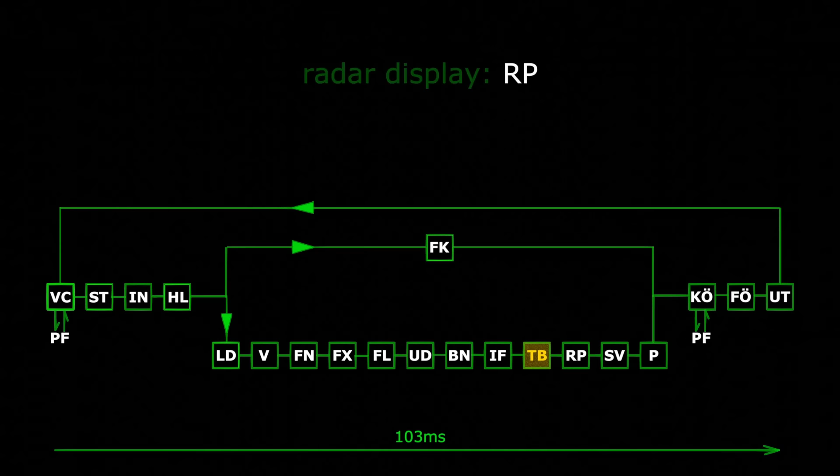You'll notice at this point we've calculated a lot, but haven't made much of that information available to the pilot. The radar display program added any necessary markers onto the radar screen at this point. This was followed by the fire control subprogram, which computed lead and ballistic drop for unguided weaponry, and the position in which to plot a target marker. Again, these computations would only be performed if the selector switch was in the appropriate mode.

Finally, all the necessary variables were converted to physical locations on the heads-up display and plotted there using the display subprogram. Finally, the program returned to the main branch where some self-checking routines were run and the entire loop repeated.

Now, let's go back and talk about that 103 millisecond cycle time. The one output that was unacceptably slow was the heads-up display. Every 34 milliseconds, a counter triggered an interrupt, and that paused all calculations and updated the artificial horizon and the velocity vector on the HUD. This was frequent enough to eliminate perceptible lag to the pilot.

Other interrupts were used elsewhere, mainly for fault handling. For example, if a power fluctuation was detected, an interrupt would trigger and save the contents from all of the registers to memory. This would allow the program to resume if power was periodically lost and then regained.

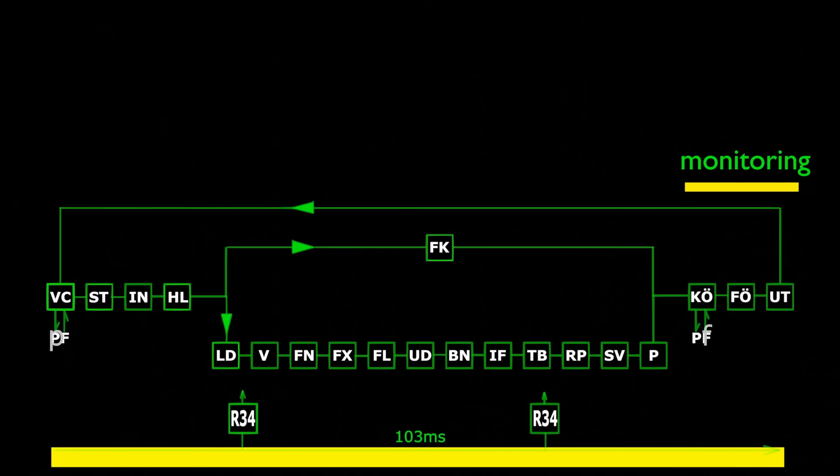Even with the limited compute resources, all of the above was able to be performed in that 103 millisecond loop, with about 10% time to spare. So, the remaining 10% was used to perform diagnostic checks, where known randomized inputs would be fed into the computer to check it returned the correct outputs. Any deviations would be reported as a fault to the pilot.

The act of programming the CK37 sounds surprisingly advanced and organised for the time. All the subprograms I mentioned could be run standalone and independent of one another, so this allowed them to be developed by individual programmers and tested separately.

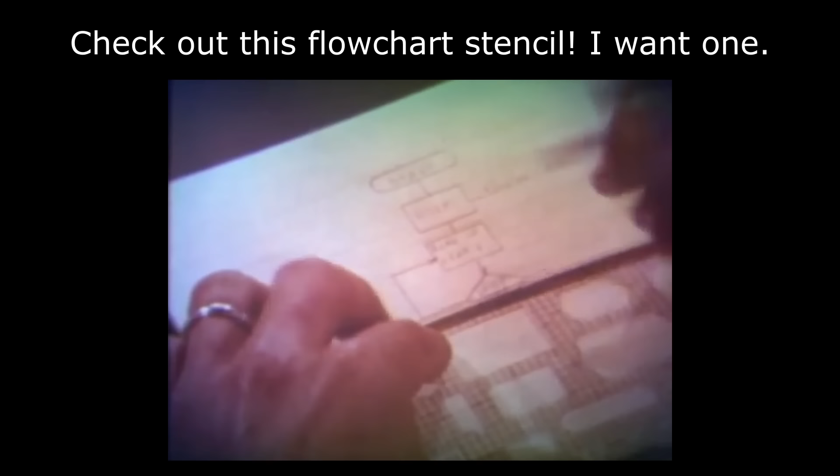Programming was conducted using the NAC assembly language. Code was initially written by hand, documented, checked, and signed off during coordination meetings. Over time, the team started developing and following templates for both code and variables, and draft copies of each subprogram were filed away in binders, complete with documentation.

This absolutely sounds like a 1960s version of a modern-day code review. Really rather impressive considering this was before terms like software engineer and version control even existed.

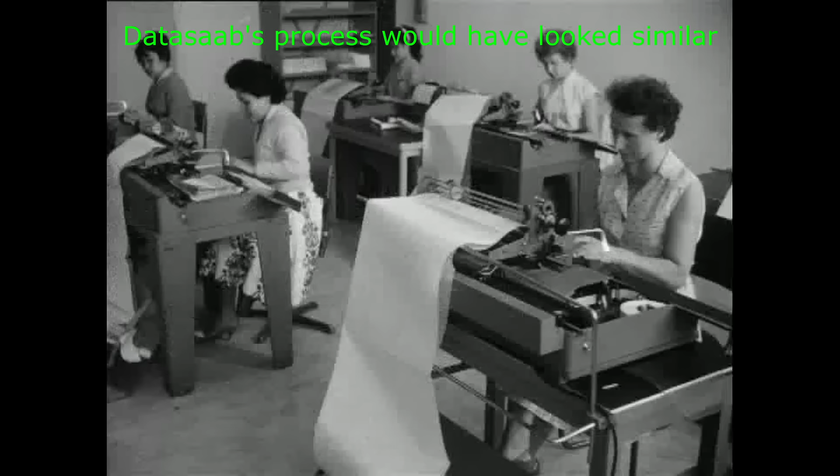To translate from a handwritten code sheet to working code, a team of data entry clerks would punch each instruction onto paper tape using a teletype machine and return the code strip the next day. I quite enjoy reading about SAAB's store of useful programs, as I keep having to remind myself this was a room physically full of punched paper tape rolls.

To test each subprogram, a mainframe computer was needed. Now, this was the 1960s, so we'd expect an IBM mainframe to appear at this point. But no, SAAB continued to impress me. They built their own. Taking design principles from the D2, they'd constructed the D21 mainframe shortly afterwards.

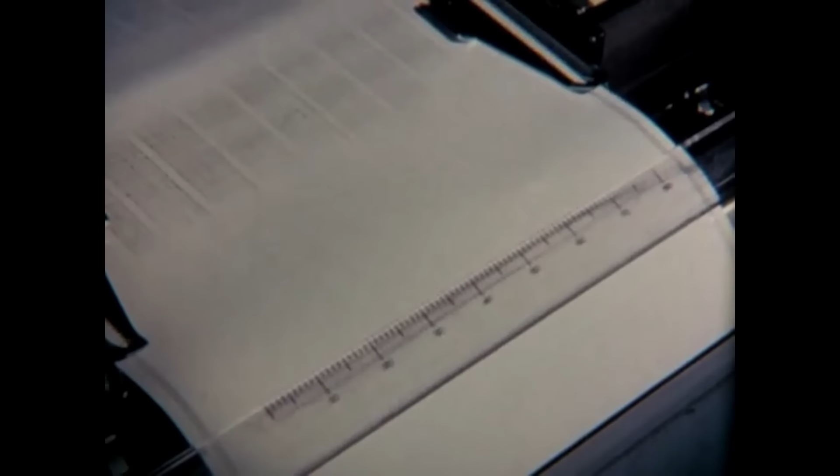When hooked up to a paper tape reader, the programs could be read in and run. It was even possible to load in corrections via correction strips if a program failed due to a diagnosable cause. So, SAAB had the capability to produce, test, and correct a program within 48 hours using entirely in-house resources. I believe the modern-day term for that is vertical integration.

As the CK37 prototypes came into existence, the software became more and more complex and complete. By the time of the first flight, a dedicated control panel was constructed to load in programs, though all the prototypes still used paper tape. The operational computers switched to magnetic tape.

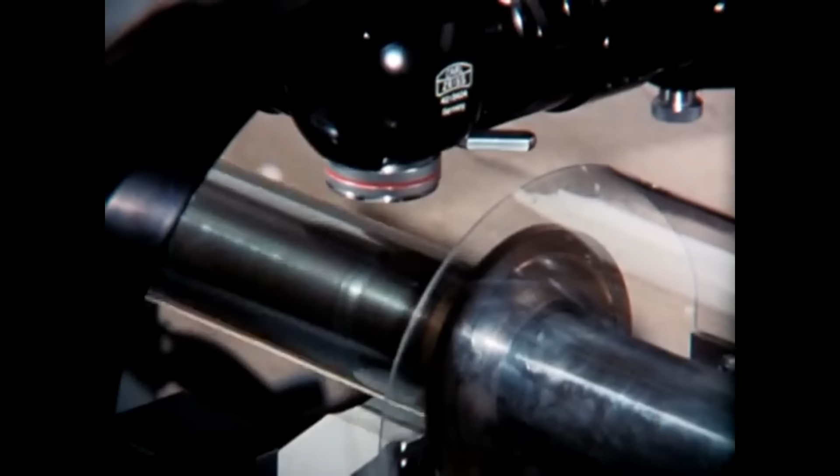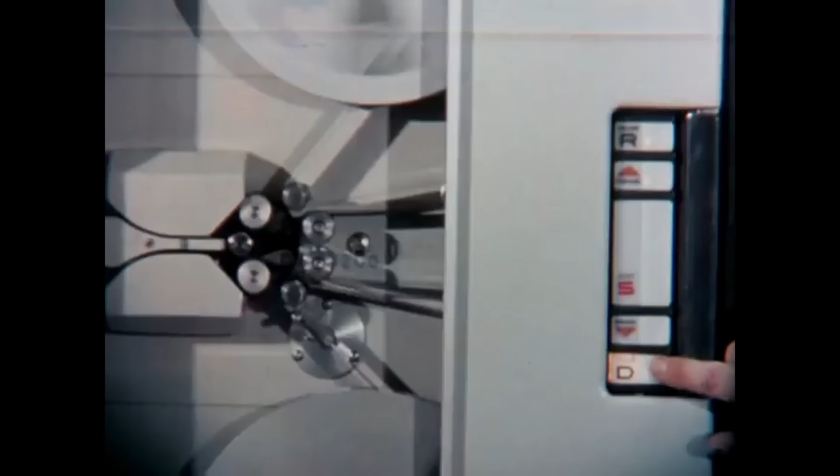This allowed updates to be delivered to the entire Viggen fleet, quote, literally overnight, end quote, if necessary. I will note this is a significant advantage over both the F-14 Central Air Data Computer and the Apollo Guidance Computer. Neither had an ability to update their entire codebase without either physically removing and replacing a ROM chip or having more core rope memory manufactured.

The code for the CK37 was updated and improved until its retirement in 2001. Subroutines reading and writing to global variables, triggered based on a timer, were supplemented with object-oriented code sometime in the 1980s. In addition to the memory upgrades mentioned earlier, the AJS variant incorporated an Intel 286 coprocessor, and programming eventually moved from handwritten sheets and teletype machines to Sun Microsystems workstations. But the base hardware of the CK37 remained, and it continued to run essentially the same program loop created in the 1960s, with additions throughout its entire operational life.

Like so much cutting-edge military hardware, the Viggen was never really used in anger. That is, I suppose, the intended outcome of an armed neutrality policy. But that doesn't mean they weren't deployed regularly to ward off probing Soviet, and sometimes NATO, aircraft. They were involved in several non-shooting engagements that have since gone down in the history books. But I'd like to take this chapter to discuss the most famous, and this one specifically involved the AJ-37 variant.

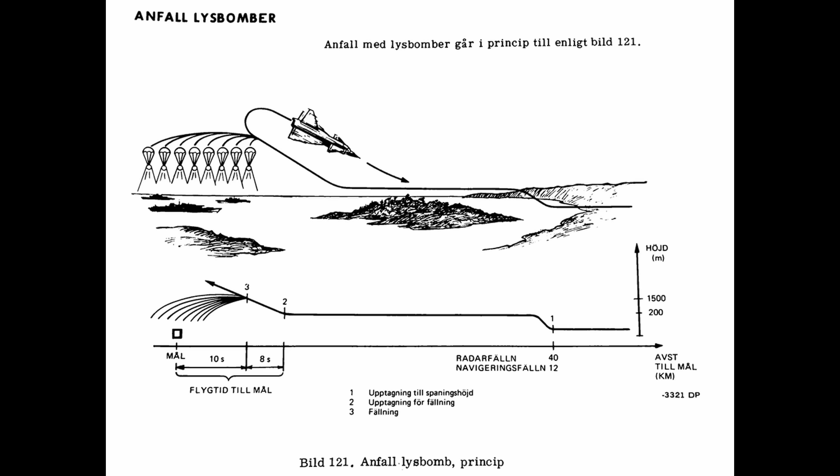From this point onwards, AJ-37 Viggens were constantly in the air, monitoring and harassing the Soviet fleet and carrying out repeated flyovers of the submarine. This was, of course, a very explicit show of force. Had things got hot, the AJ-37s would first escalate to a more direct show of force by dropping a bomb in front of any vessels crossing the border. If that didn't stop them, strafing runs would have been carried out using air-to-surface rockets. Finally, anti-ship missiles would have been used to sink the fleet.

And make no mistake, the Swedes had the best anti-ship missile on Earth at the time. There is a good chance that fleet would have ended up on the bottom of the Baltic. Whoa, alright, listening back, I inadvertently said something controversial there.

I'm British, so obviously my true position is the best anti-ship missile around in the 1980s was the Exocet. Regardless, the Swedish RB-04 anti-ship missiles of the time were apparently excellent. Luckily, it never got that far, and I can only imagine how the Soviets would have reacted to that.

Of all the poor decisions the Soviets made during this event, this has to be the worst. I cannot even begin to imagine the decision process that led to them putting nuclear armaments on a spy submarine. But I guess this was the Soviet Union in the 1980s. There probably was no decision process. I like to imagine someone put them there years ago and just kind of forgot about them.

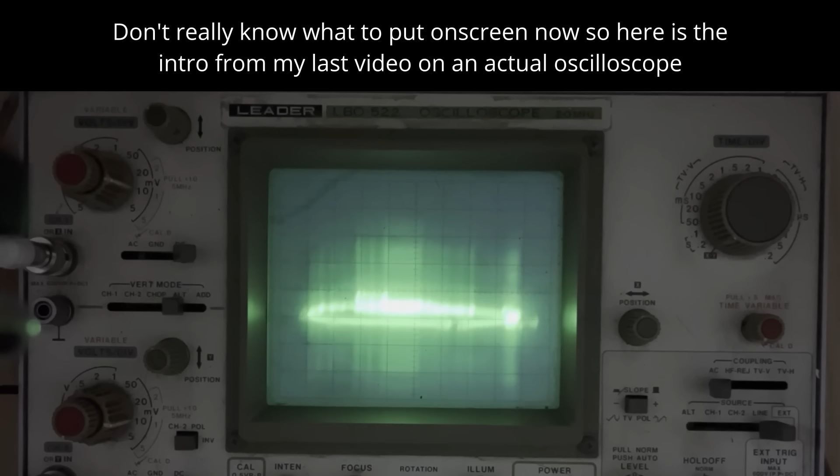In recent years, at least a couple of Western nations, including the UK where I live, have willingly elected leaders who have demonstrated, or just flat out stated, they do not back down and never apologise, as it is, paraphrasing, quote, a sign of weakness. Make of that what you will.

I think the CK37 was an elegant solution to a very particular problem. It's something I hadn't really studied much before I made the video on digital fly-by-wire about a year ago, but it's definitely something the Swedes were proud of, and rightfully continue to be proud of to this day, evidenced by the number of requests I've had to make this video.

Today, it is absolutely reasonable that many new technology breakthroughs are met with skepticism from the general public. Who listening to this video actually uses what is now referred to as AI for anything genuinely useful? And filtering out oversold hype from genuine innovation can be really difficult. Amongst other things, I always look for tangible applications and a proven track record when evaluating emerging technology.

Back in 1960, the CK37 had an extremely well-defined objective, and meeting that objective would remove both a crew member and an engine from Sweden's frontline fighter jet. In retrospect, investing in development of an IC-based computer was a no-brainer.

When presented with the 200-kilogram Forerunner in 1960, leaders did not have this hindsight, so pursuing the CK37 would have seemed far riskier. However, the actual engineers at SAAB were reportedly delighted with that 200-kilogram machine. It represented a proven track record.